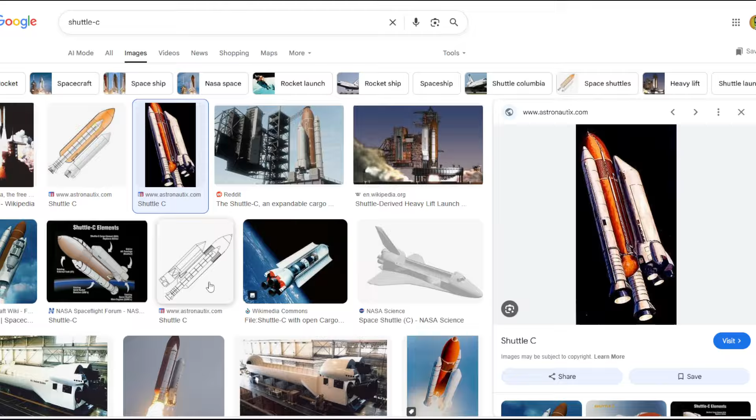There's this version of Shuttle C where instead of making it sort of plane shaped, it's got the detachable pod in the back and then a huge fairing, and that's to help with things going to a higher orbit. So there's these variants, but personally, I have my own preferred way of looking at it. But let's take a look at this paper and see what it has to say for itself.

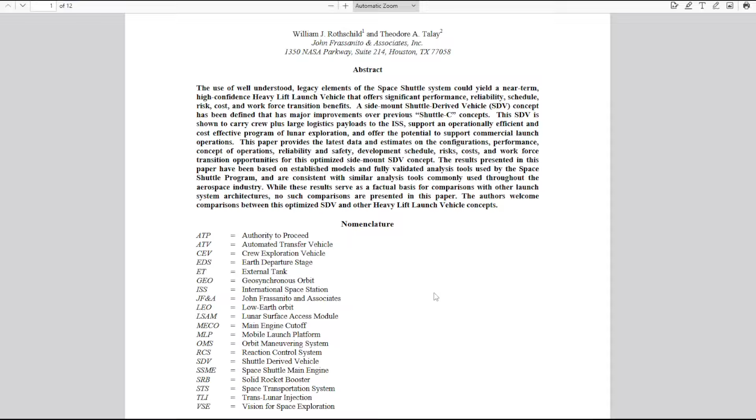Now, this was part of the proposals during the Constellation era, so contemporary with the Jupiter program and Constellation and all of that, which ultimately Constellation won, and then it turned out that they didn't want to fund it properly. The Bush administration at the time did not give enough money, and the Obama administration afterwards realized there wasn't enough money, so then they had to come up with an alternative that was cheaper.

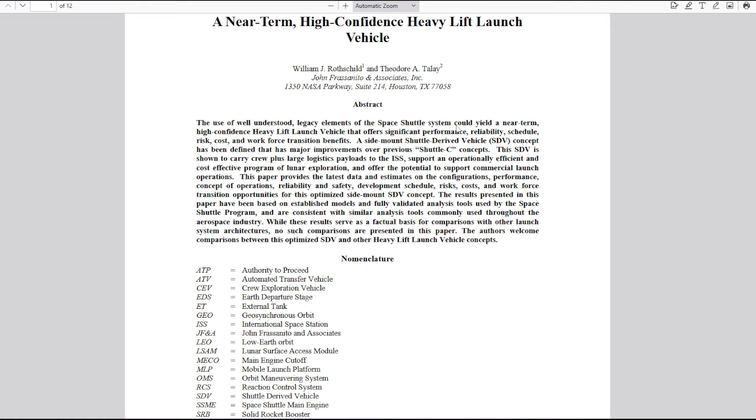So here we've got President Bush announcing a vision for space exploration to return Americans to the moon by 2020. Oh, well. So we have this 90-day study, the Exploration Systems Architecture Study, and this is trying to provide a high-confidence, heavy lift launch vehicle for that.

We've got this example of a Shuttle C configuration, and this industry NASA Team Concept B shuttle-derived launch vehicle. This one has a larger fairing. You'll note that it looks very different on the back end than the other one because it doesn't have the OMS pods. This one did have the OMS pods.

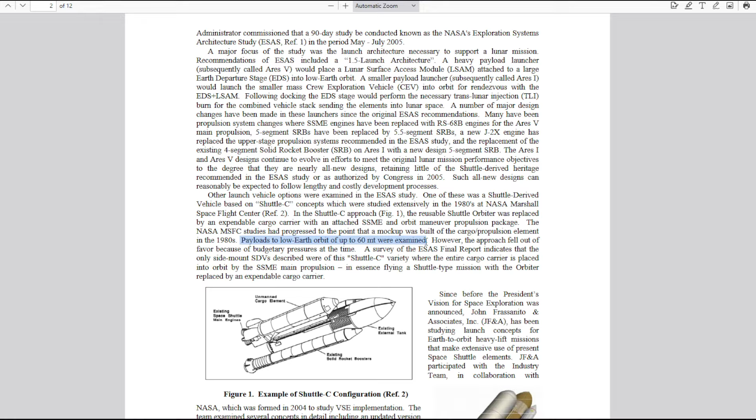So this is just going through the history of it here, and payloads to low Earth orbit of up to 60 metric tons were examined. So the idea is that if you take off the wings, if you take out the crew module and all the excess stuff that won't be necessary for this configuration, then this can get 60 tons to low Earth orbit. So that's pretty good, and that is a heavy lift launch vehicle.

So we've got that. However, the approach fell out of favor because of budgetary pressures at the time. Still budgetary problems. Now, they're talking about the historical situation. This concept was studied in the 1980s. So the question that we have to ask ourselves is, why are they proposing it again, given that it's fallen out of favor, right? Given the budget.

So it indicates that the only side-mount SDVs described were of this Shuttle C variety, where the entire cargo carrier is placed into orbit by the SSME main propulsion, in essence flying a shuttle-type mission with the orbiter replaced by an expendable cargo carrier.

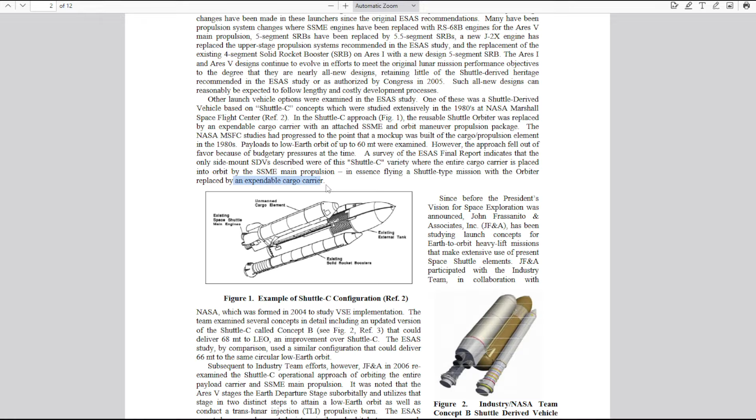So here we have expendable cargo carrier, right? Presumably they're noting that because they're going to object to the expendable part and try to recover this, but that's just my guess, reading it along the way. Sorry about this being just reading a paper, but the reason I want to look at this is because I have to decide whether I want to make a model of what they're going to propose.

So if they come up with a nice plan, maybe I'll make a model for it in Kerbal Space Program and try it out and use it. But we need to see whether they've got a good idea here or not. I'm not going to use the expendable version.

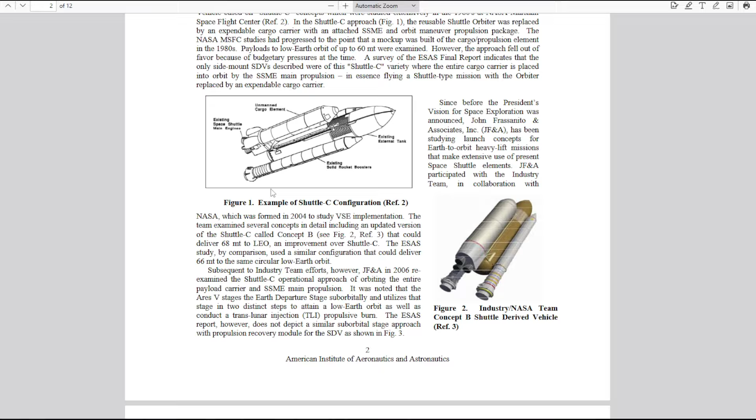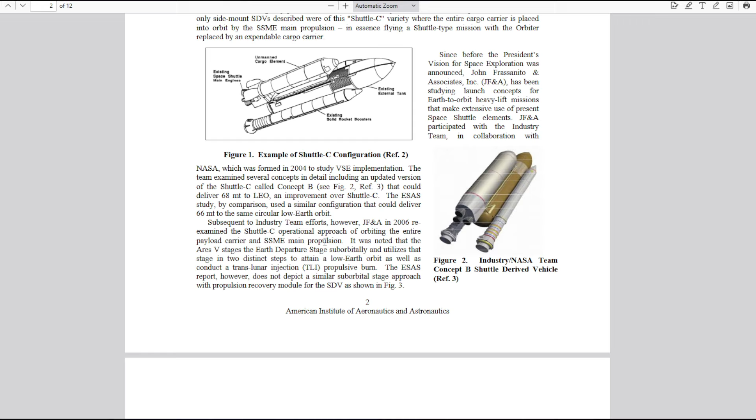So let's see. Subsequent to industry team efforts, however, John Frassanito and Associates in 2006 — so this is a little bit after the original process — re-examined the Shuttle C operational approach of orbiting the entire payload carrier and SSME main propulsion. So are they going to end up with my shuttle mouse thing?

Shuttle mice, if you haven't seen them, are basically little winged vehicles that carry the engines. Imagine in the back of this, and this is my preferred configuration, by the way, a little winged vehicle carrying the 3 engines, and this would glide a bit in order to slow itself down, but ultimately it's safer to parachute it down. It'll aim for the right location, but instead of trying to make a runway landing, because it's not got that much lift, and it's got really heavy engines inside, it would just then parachute down once it's gotten into the right location.

So we'd have a winged vehicle in the back, but it'd be relatively small, and then we'd have the structural extension to the front. So that's sort of my shuttle mouse thing, and also I've used shuttle mice on the sides of SLS in order to recover the engines like that. So SLS would have engine recovery at least.

We could also use the ULA Smart approach where we recover the engines like that with a huge balute or something. But I still don't know how to make a balute necessarily in Kerbal Space Program. People have made balutes, but personally I'm not entirely sure. So we'll set that aside for now.

It was noted that the Ares 5 stages the Earth departure stage suborbitally, right, and utilizes that stage in 2 distinct steps to attain a low Earth orbit as well as conduct translunar injection. This is very similar to the S4B stage on Saturn V. So yes, the Earth departure stage completes orbit.

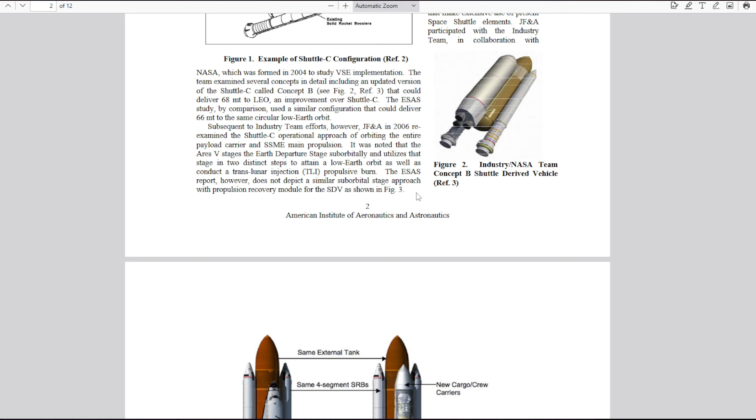The ESAS report, however, does not depict a similar suborbital stage approach with propulsion recovery module for the SDV, as shown in Figure 3. So here we have their Figure 3, suborbital staging shuttle-derived vehicle with recoverable propulsion avionics module.

So they've got this new recovery module here, and my first objection is the engine nozzles are going to get fried, right? Let's see if they've got a solution for that, but that doesn't look like a pod of any kind, right? So we're going to have a ballute somewhere, hopefully, or some sort of inflatable heat shield, because otherwise this thing is going to get smoked.

And so they've put the upper stage inside this cargo carrier, and that's my second objection to this. We would like not to have the extra structure. If we could design it so that our upper stage is the structure, and in particular also is capable of transferring the thrust from the engines to where it needs to go, which is the intertank, that would be ideal.

If we do not — and I've mentioned this before — it's the intertank part up here that bears the thrust of the boosters and the engines. So if we want to make this work, we need some replacement for all the structure of the orbiter. We can't just have the little thing in the back and not transfer that thrust to this location here. So the orbiter is very rigid and strong because it has to deal with aerodynamic forces and reentry. So it does transfer the force very well, but it's also heavy.

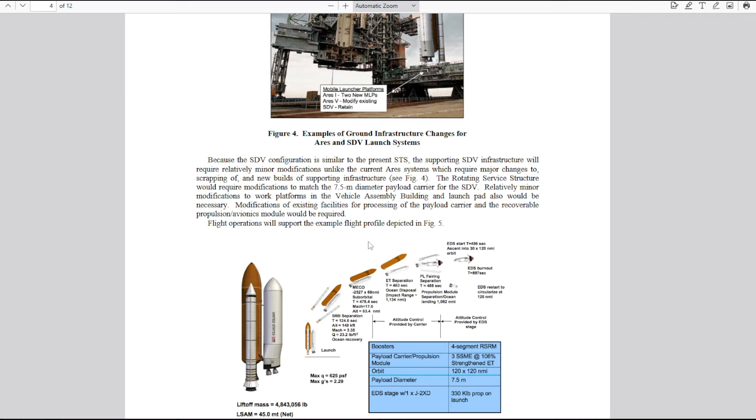And the result of that is that they have to maybe strengthen the external tank, or make that extra fairing stronger. They are pointing at the same external tank here, so they're saying that, but do they mean it? While you're reading, you should come up with questions you're going to try to answer by reading further.

So the following important changes occur in a lunar launch architecture when a suborbital staging SDV is included in comparisons with the recommended architecture. So this is the organization that's coming up with the idea. I wonder how much money they got for it.

Anyway, suborbital staging of the payload carrier, release of the upper stage and payload, followed by the first burn of the upper stage to place the attached payload in orbit, significantly improves the payload capability of the system to 78 metric tons. And this is obvious — what you've done is reduced the burden on the external tank fuel and the engines.

So we've got now a sort of 2.5 stage configuration, but most of the work to get to orbit is still done by the external tank and the SSMEs, which is fine because they're overwhelmingly efficient engines. The RL-10s are better, but still, only by a little bit.

And the external tank is going to provide 6,000 to 7,000 meters per second to orbit. The booster is about 1,000 to 1,500 in this configuration. So then the new upper stage is going to do the rest. And that's still overusing the external tank, but any amount that you can cut down on using the external tank will benefit your payload capacity.

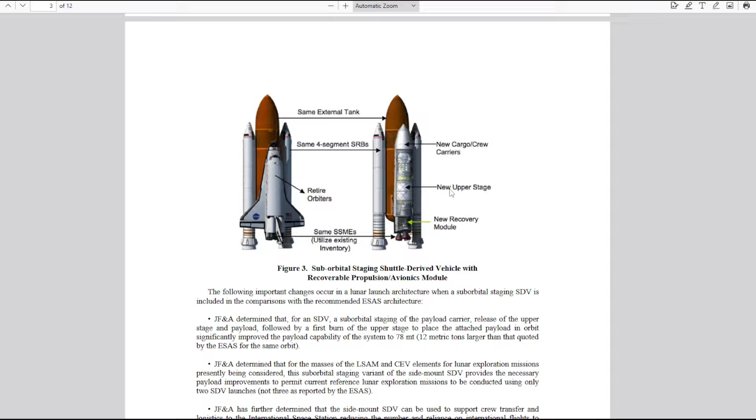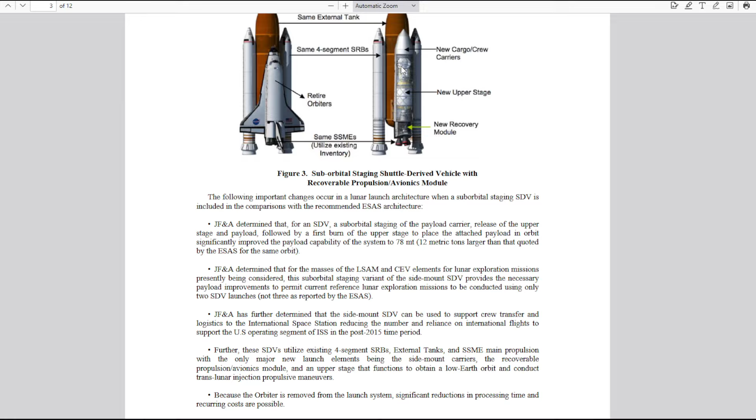So that's going to lead to aerodynamic complications, and they're going to have to certify the aerodynamics of it. But that's, once again, one of those unavoidable things, I think. Otherwise, we'll have to have another vehicle transferring the crew to the crew vehicle when it's in orbit. So we'll have to take a little Dragon up or something, and then it'll dock to the crew vehicle, and then that's a third launch.

So anyway, further, these SDVs utilize existing 4-segment SRBs and external tanks, so they're going with existing hardware here. That means we're going to need the thrust transferring structure to be part of this pod here.

Because the orbiter is removed from the launch system, significant reductions in processing time and recurring costs are possible. So a lot of the time that's taken for the orbiter is, well, there's the tiles for recovery, but it's mainly to do with the fact that we're launching crew on it. But then if we're launching crew on this, it'll probably take the same kind of time because we're going to be careful with the crew. Similar to the present STS — well, similar is a strong word for what we've got here.

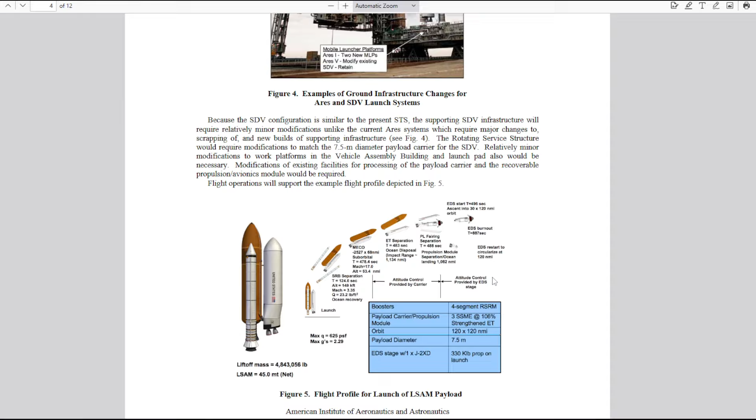This fairing is looking bigger and bigger by each new image, isn't it? Here's the catch here — see this strengthened ET? Wait a minute. You said that we were going to have the same ET, right? Same external tank. Oh, now you're going to say we're going to have a strengthened external tank. Why do they need this?

Well, because this fairing thing isn't as strong as the actual shuttle. So there's a flaw — they're sort of redesigning the external tank on the sly here. But they only say it in this little bit right here. Let's see if they say it in a text somewhere.

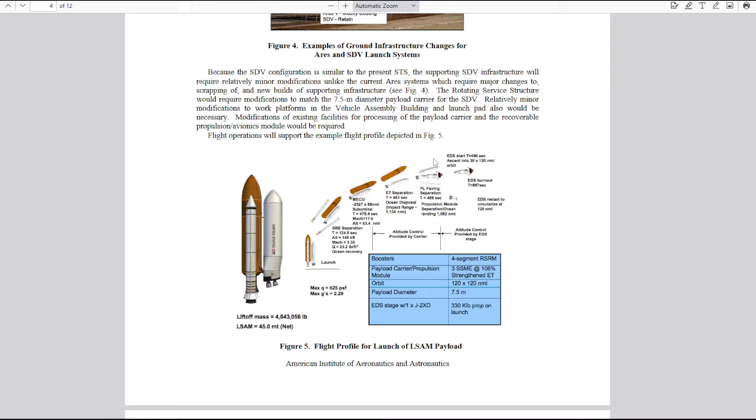Rotating service structure would require modifications to match the 7.5 meter diameter payload carrier. So now you've got ground structure changes, right? Because we've got this now very large thing on top here — 7.5 meter diameter payload carrier for the SDV. Relatively minor modifications to work platforms in the VAB. Well, probably they're minor. Modifications of existing facilities for processing the payload carrier and recoverable propulsion avionics module will be required. Well, that's fair enough — that's the price of trying to recover it.

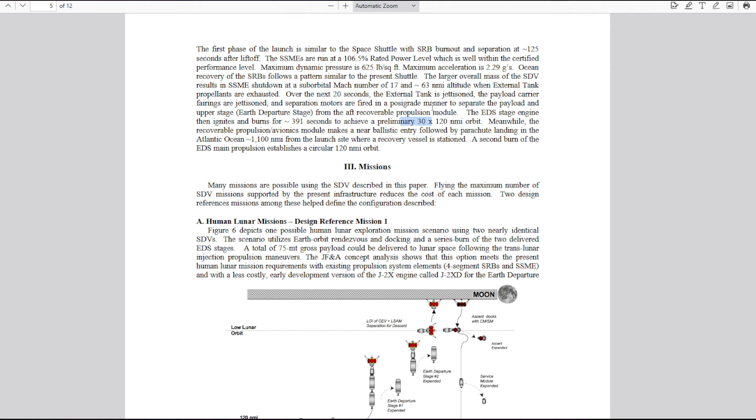So the phase launch, very similar. Yes, I would expect that. And they say that they're going to go to 63 nautical miles altitude, which is basically where the shuttle hovers anyway before it does the OMS burns. And then jettison payload carrier, EDS stage engine ignites and burns for more than 6 minutes to achieve orbit. And actually that's for the preliminary orbit. So they're using the EDS a lot, and therefore it's probably the case that they're trying to use the external tank and the SSMEs for something more like the optimal amount.

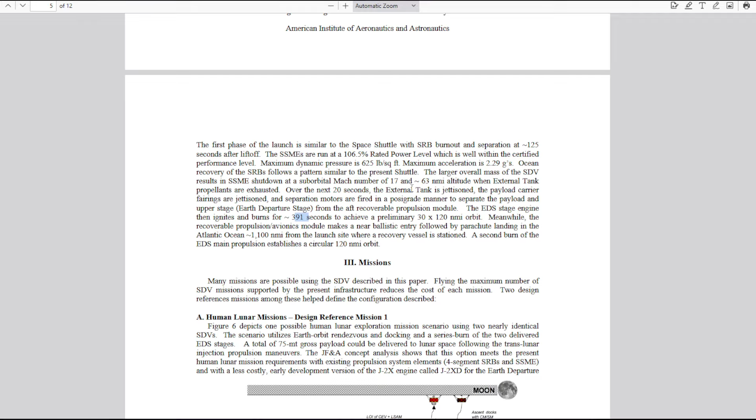So maybe I was overestimating with the 6,000, 7,000. They seem to be using far less if it's going to burn for that long. Either that or they're using a very weak engine on the EDS stage, but I thought it was going to be a J2X. It is a J2X. So for that long a burn, first of all, they're pushing the burn time on the J2X quite long, because that's just to get to orbit, and then they have to transfer to the moon. So that's 6.5 minutes to get to orbit, and it's going to take maybe 5 minutes burn to get to the moon. So they're using all the burn time.

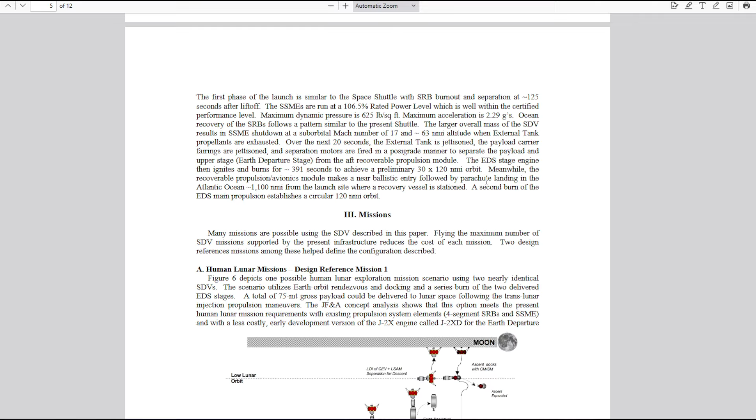Meanwhile, the recoverable propulsion unit will make a near ballistic entry. It's actually, if they're taking that long to get to the moon, it's in one of those dodgy sort of situations — where is it even going to land? Let's see, it's going to land in a rather inconvenient place — the Atlantic Ocean, 1,100 nautical miles from the launch site. So that's a bit far out. And the Atlantic Ocean is not always nice about things — in other words, it could be stormy and stuff like that.

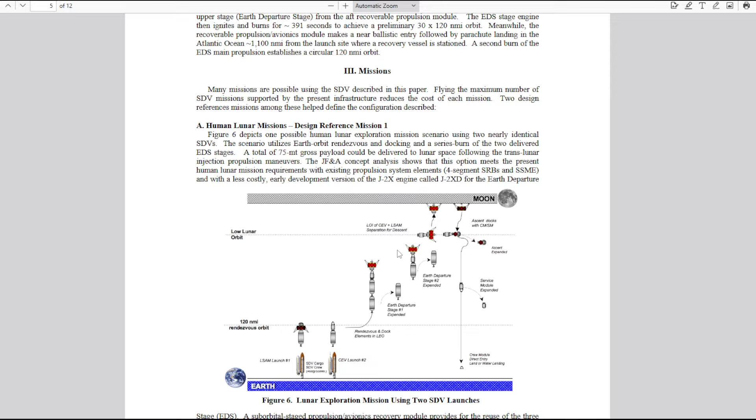But, okay, human lunar missions, design reference mission 1. So here they're going over it. Now, they haven't really given us a whole lot of detail on the timing of everything, but we've got enough that we could make it work out.

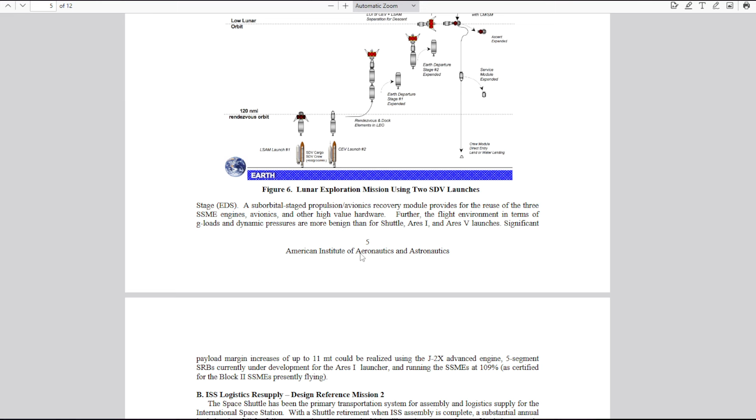So here we've got design reference mission 1, but some of my questions have not been answered. Let's see if we can get some.

I think there's two things. One, I am not confident that they've got the recovery of the rear end proper because the engines are sort of exposed and I haven't seen a boot yet. And B, I think the front end, maybe we should make it more integral structure so that the stage is actually helping to transfer the energy instead of having this extra fairing. That's my current assessment of this and how I'll think about redesigning this.

So we can think about that. And that's why the original versions that we see up here sort of look like the shuttle, right? They have the cargo bay doors, but I don't even want the cargo bay doors per se, I just want the structure.

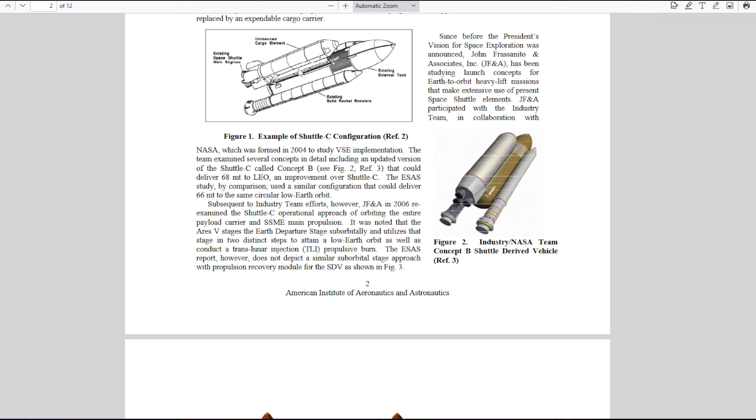The ISS logistics I'll set aside for now. Estimated payload of 45 metric tons with a Centaur stage inside. So it seems like it's trying to push an ISS module, a crew module, and then the Centaur stage. This is a lot.

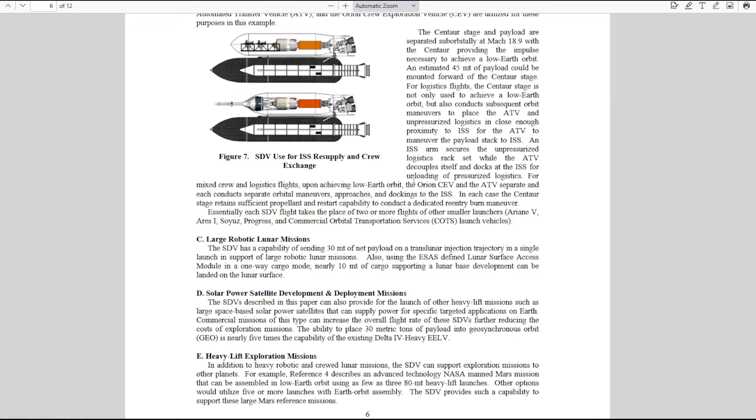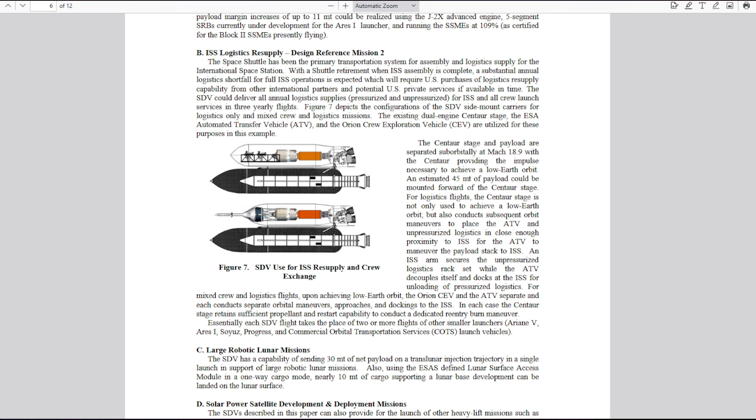Anyway, they're trying to use this cargo carrier as an agnostic thing. In other words, for the ISS missions you'll have it, and then for the lunar missions you'll still have it. So it's the same module, so that seems to make it easy.

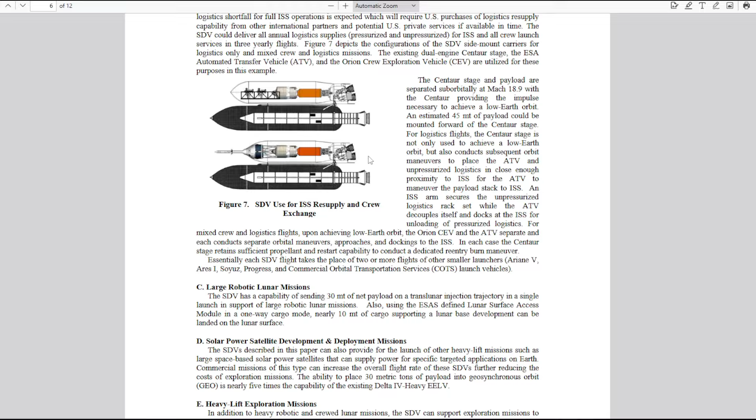However, there's two of them, isn't there? There's this one, and then this one's shorter because it has to accommodate the launch escape system. So already there's that going on too. But we'll think about how to improve upon this. Solar power satellite development and deployment missions, heavy lift exploration missions, yeah.

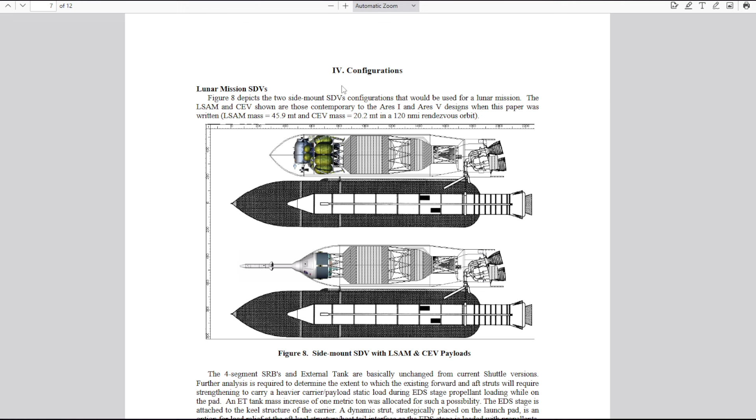Oh, here we go, so here we have the lunar configuration. And what you see is the upper stage is the Earth departure stage, more of, instead of like the Jupiter system where it's a shared bulkhead tank, we've got separate tanks for the hydrogen and oxygen. This is more like the EUS on SLS, but larger because we've got a larger engine here. And it almost takes up the fairing.

So you wonder here, looking at this, they have it sitting on the nozzle, but instead of this, you see a frame around the nozzle right there. If instead of having this frame here, you actually had the frame down below so that it was meant to convey the thrust of the engines down to the intertank, like this. Right here, this top part of the hydrogen tank can almost reach the intertank. So as long as you had the right structure back here, you could probably convey the thrust of the SSMEs all the way down to here.

So I think redesigning this back part and then leaving off the fairing as it is, instead of having the fairing around the entire thing, just have the fairing on top of the stage, right? So the fairing will just be this top part, and same over here. And then you'll save some mass that can be used for the structure that you need to convey the thrust. And so that's what I would suggest.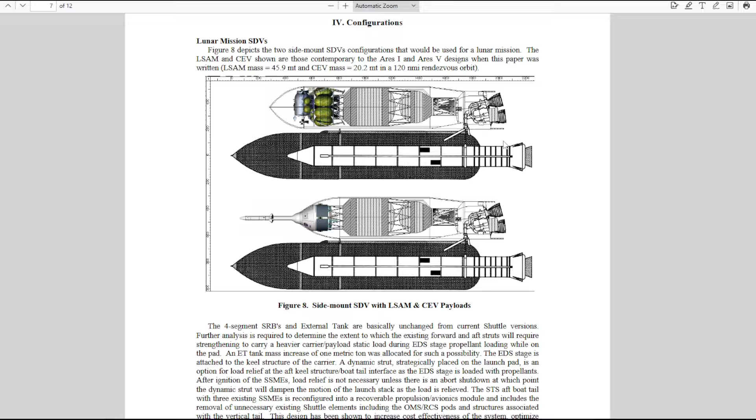I don't know whether the tanks are meant to bear the thrust of the SSMEs. I'm just saying straight up build a structure to bear that thrust. And that structure hopefully will be comparable to the mass of the fairings that we're discarding. So that is the goal. And the purpose of this is to avoid redesigning the external tank at all.

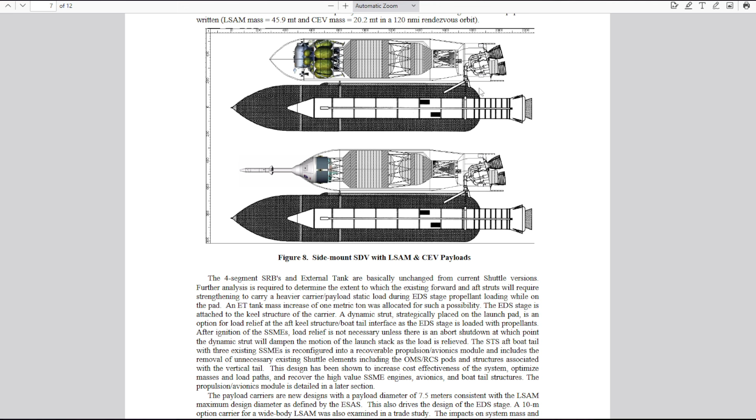Because right now I'm looking at it and I'm going, and they have said strengthen the external tank too, you're probably going to need to do some work on that. Okay, so we've got the masses now, so that's good.

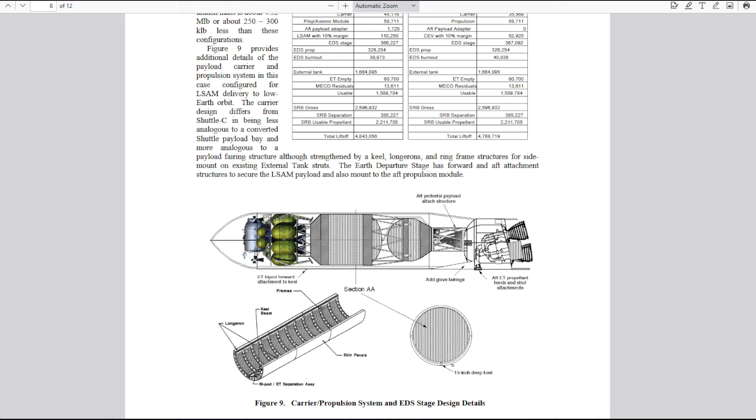So I can use this and just plug the numbers in. And my remaining question is, how are we bringing this module in the back down? Okay, so here's the propulsion avionics module. I'll link this in the video description, by the way.

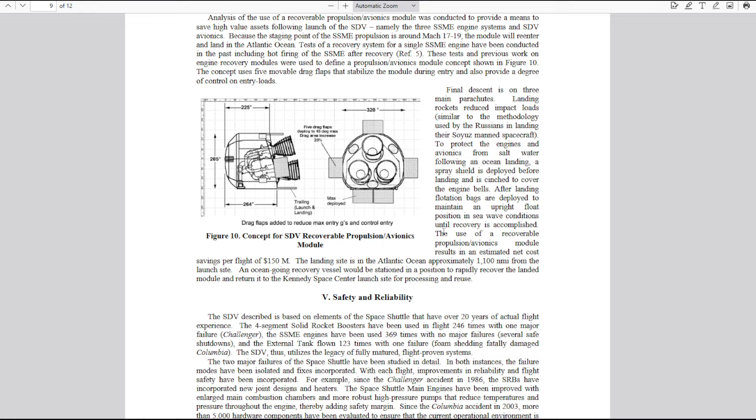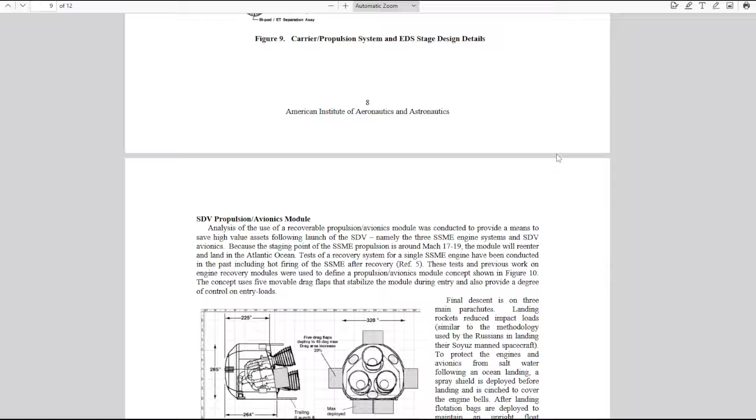We've got flaps to add drag. But I think that'll still work. I noticed... oh no, they did have them on that one. Okay, they have the flaps on all of them. I'm just checking that they've been consistent. So they have these flaps. Final descent is on 3 main parachutes, so they're not using a ballute system or anything like that. They're relying on these flaps to be enough to create drag. I don't know if that's enough.

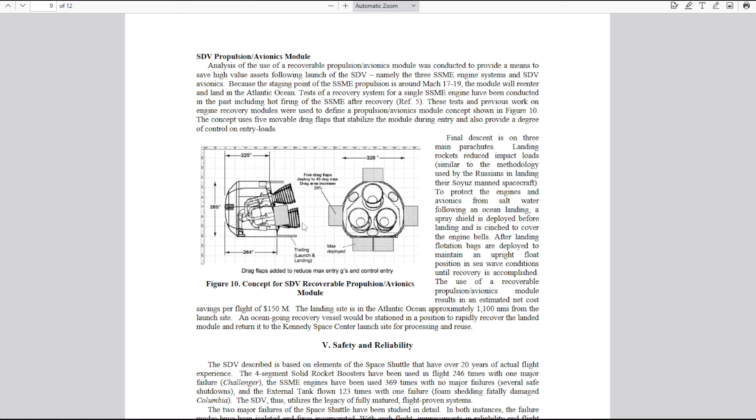It'll go nose first, and so they've got this having heat protection, I'm sure, and it's curved like this, so that's good. But it's still not convincing me that this is pod shaped, and there's not enough area down here considering how heavy the SSMEs are. But anyway, maybe we can just straight up try this and see what happens.

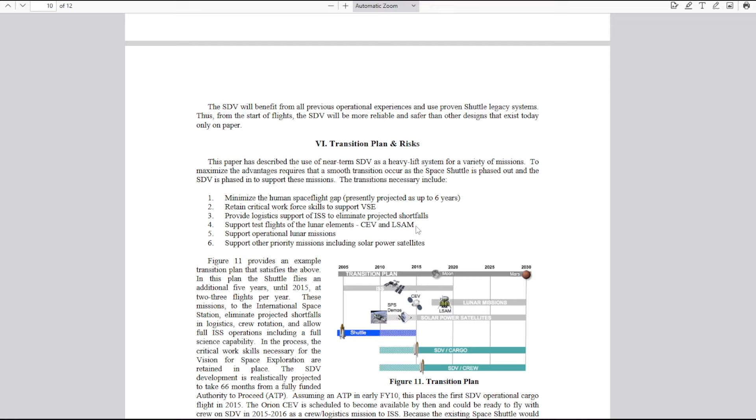In other words, I can make something like this for sure. Transition plans and risks I'm not going to go over, and the development and recurring costs will be inevitably optimistic.

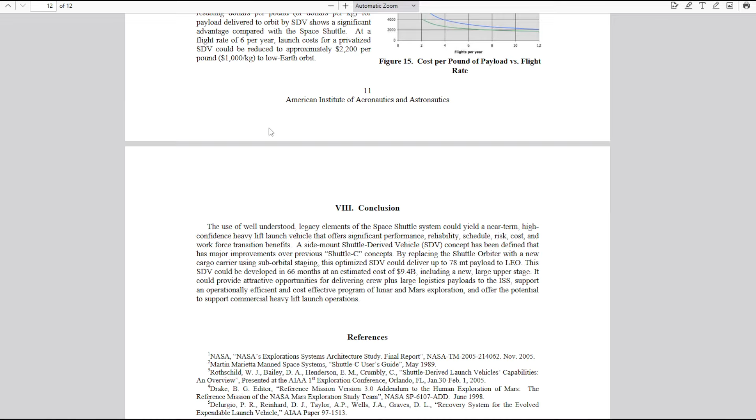In conclusion, the use of well-understood legacy elements of the space shuttle system... oh, there we go again. I'm telling you, it didn't work out that well, we know now, but could yield a near-term high-confidence heavy-lift launch vehicle that offers significant performance, reliability, schedule, risk, cost, and workforce transition benefits.

And the side-mount shuttle-derived vehicle concept has been defined that has major improvements over the previous Shuttle C concepts. Okay, so again, the other Shuttle C would go all the way to orbit, and I will agree with them that, of course, that's not the optimal thing if your goal is to get as much to orbit as possible.

In fact, even SLS doesn't complete orbit with the core stage. In some cases, it boosts to a high apoapsis and leaves the periapsis low, and then the ICPS completes orbit, but it does get an extra boost out of it.

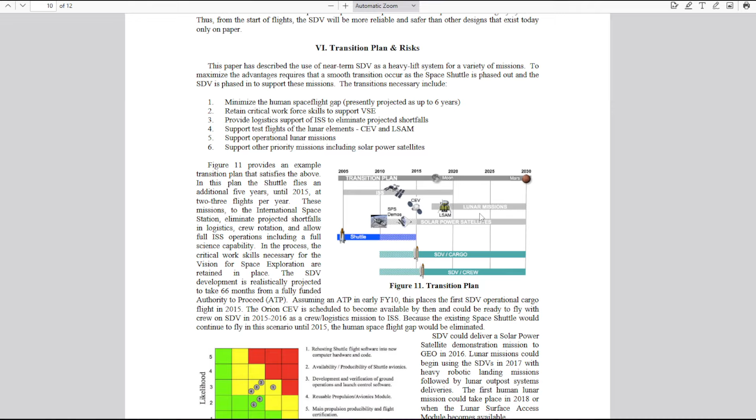By replacing the shuttle orbiter with a new cargo carrier using suborbital staging, this optimized SDV could deliver up to 78 metric tons payload to low Earth orbit. So my main thing is to design the carrier, redesign the carrier so that it does the job that the shuttle did in order to convey the SSME thrust.

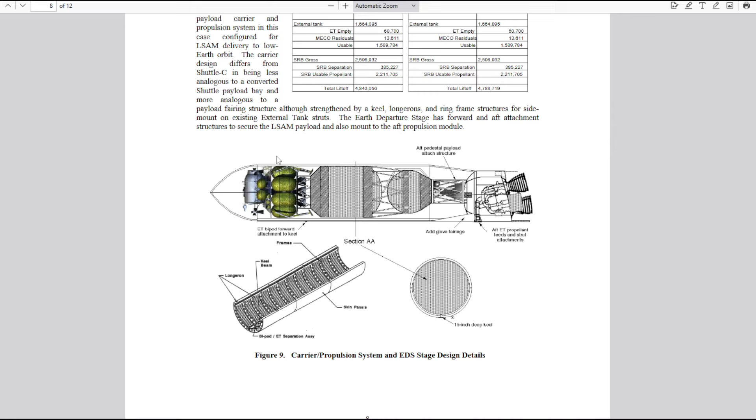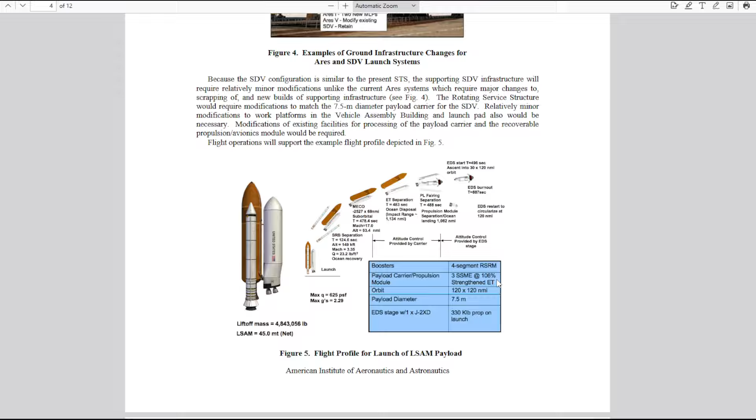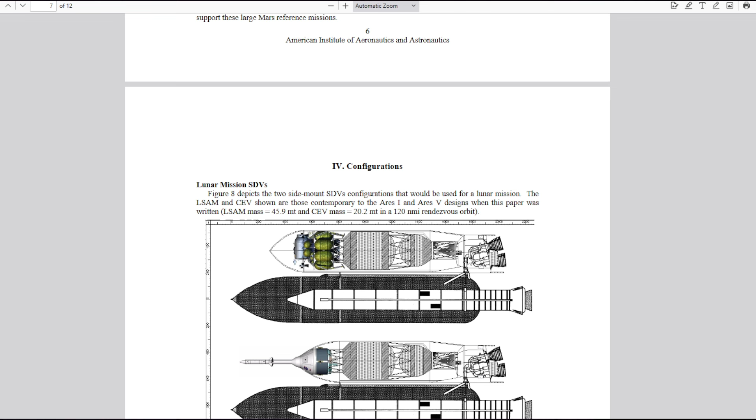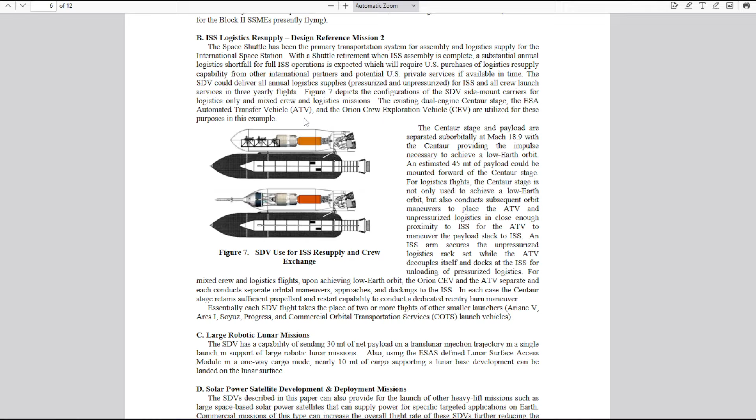And my concern is brought about by the strengthened ET mentioned here. So maybe I'm wrong about that, but that's one thing. And the other thing is that the carrier should just make use of the upper stage that we have. And therefore, it's not going to be agnostic so that we can do ISS logistics. We're just going to say, this is overkill for ISS logistics. That's just it. We're going to say that that is not the purpose of this thing.

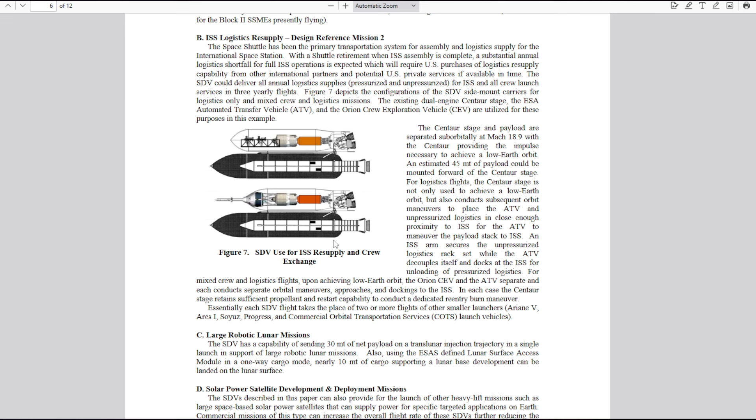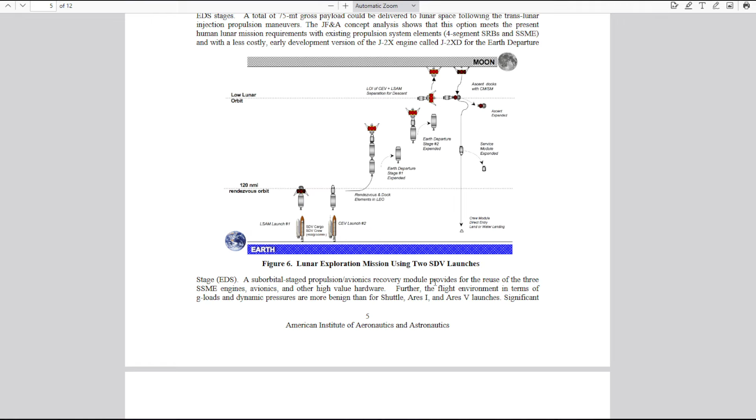Whenever they try to make something do more than one thing, they end up making it inefficient. And I think the whole fairing that we've got here is due to the fact that they're trying to make it do multiple tasks. And if we just have it do the already very arduous task of getting over to the moon, then we'll have it more focused and we'll have a much more efficient system.

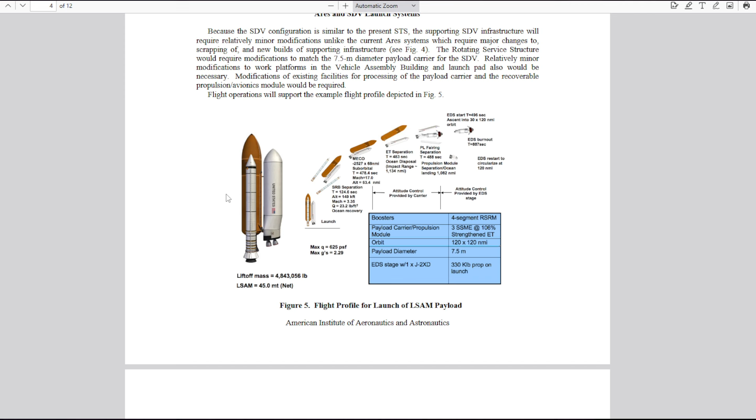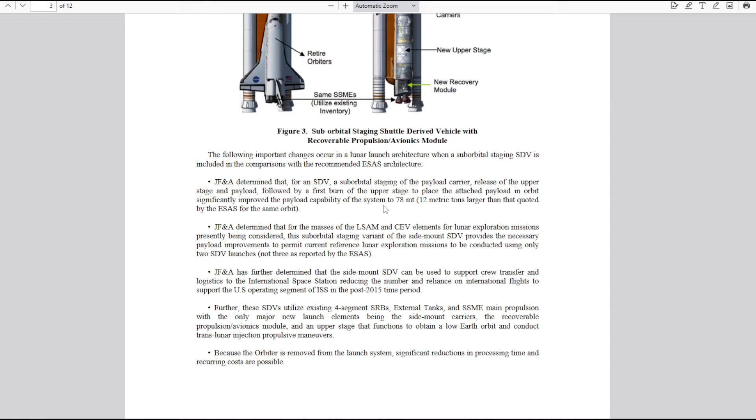So that's the idea. After all, Saturn V was designed for one thing, and it does that job really well. And then if you said, well, let's also use it to deliver stuff to ISS, well, they did use it for Skylab once, but that's it. It wasn't really meant for that. So anyway, that's my take on this particular version of Shuttle C.

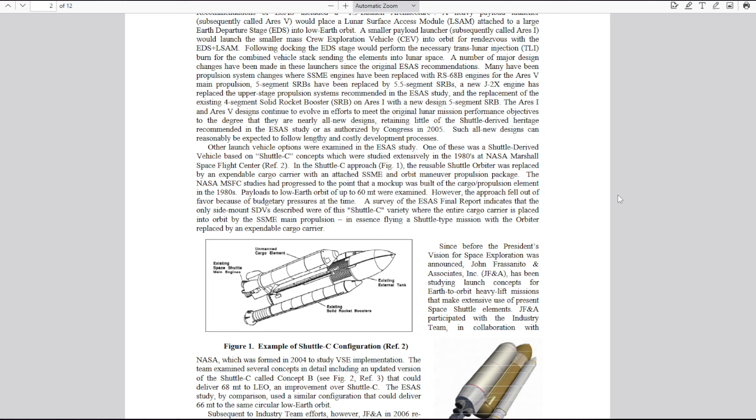And I'll let you folks tell me what you think about this. Maybe you think that the original Shuttle C is better. Maybe we should just have a shuttle that doesn't have the crew compartment and carry payload like that. All right, so that's it. That's a very long discussion of this particular version of the Shuttle C idea, and hopefully people like this sort of thing, I'm not sure.